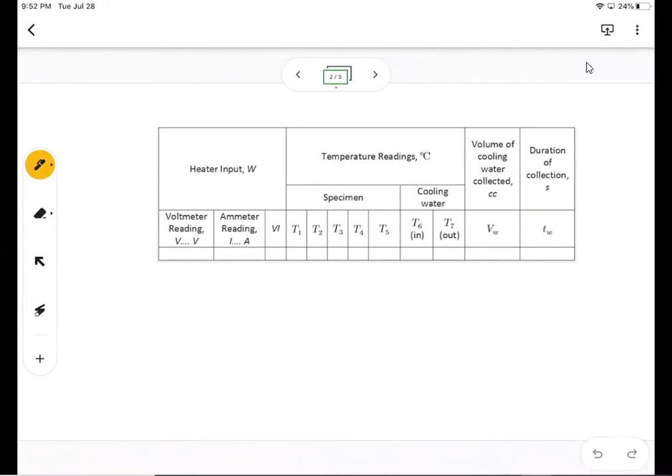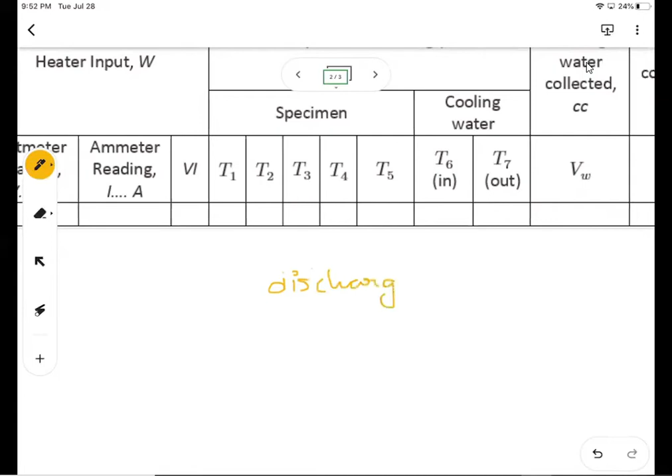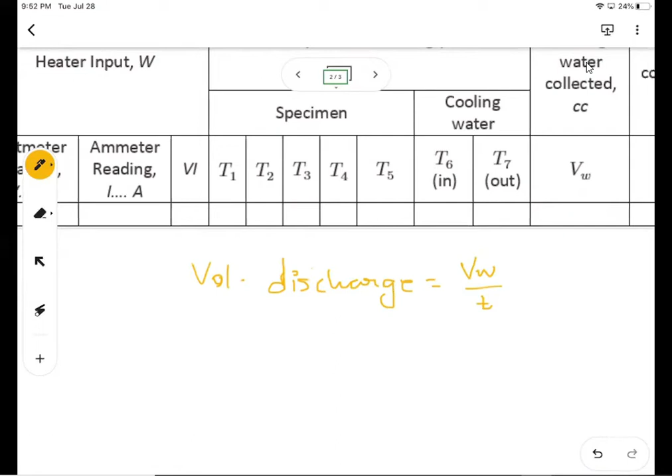Once you have volume and fix a time, the next parameter you can find is the discharge. Discharge is nothing but the volume upon time, volumetric discharge basically. This we can call volumetric discharge.

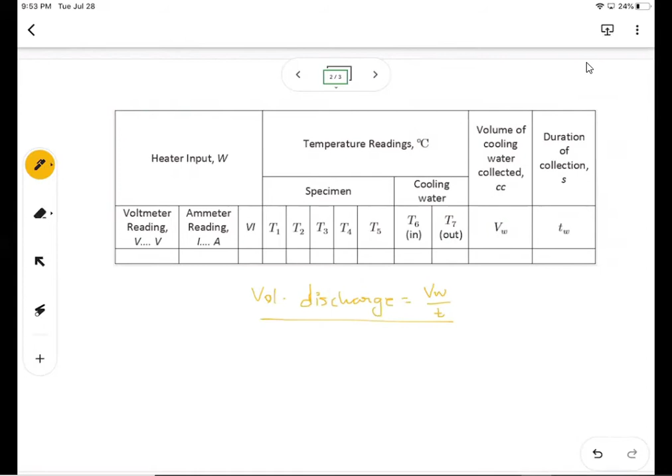So in order to find the value of K, we are going to use a very simple equation, which we have covered in our lecture also, famously known as Fourier's conduction equation, which is Q equals minus K A dt upon dx, where A is the cross section area. You can get it from here.

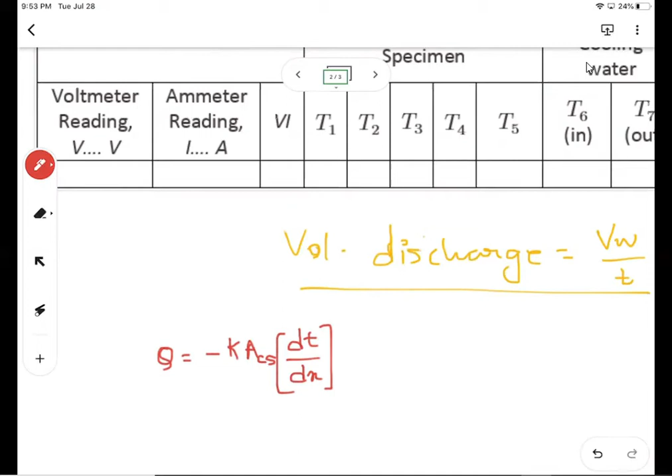But we need to find out the heat transferred through this rod, this metal rod, and ultimately the value of Q which is transferred. So to find Q from here, we use a very simple formula, Q equals to mCp delta T, where delta T is the change in temperature, or the rise in the temperature change.

Hence, there are two thermocouples attached in order to find out the temperature difference. So we can also equate this with the formula mCp delta T.

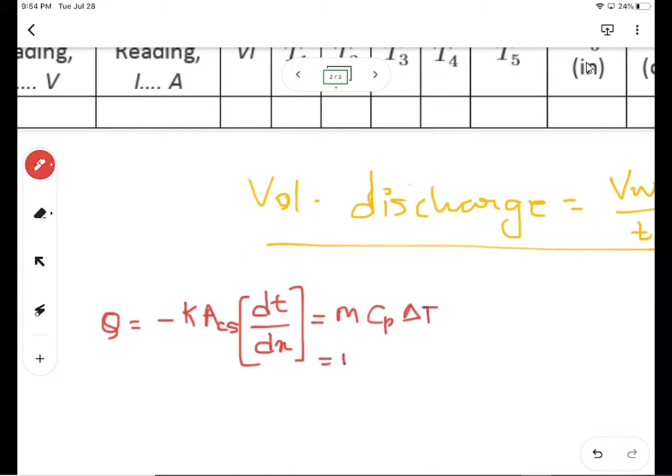Or m Cp times T7 minus T6. T7 and T6 are nothing but the cooling water temperature of output and input. So if you keep K on one side and substitute the other terms on the other side, ultimately you can get the value of K.

So this was the part that you need to know. But what about the values? Do you know what are the different values? Yes, we know temperatures T6 and T7. Cp of water is basically a constant, and we usually take it as Cp equals 4.187.

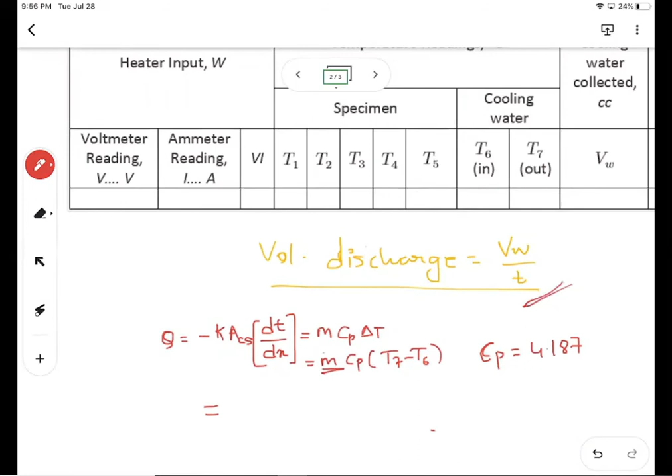And mass, m dot, we need to find out what is the value of m dot. We can get the value from here. It's very easy. We know that the volume discharge is given by this formula. Now, if suppose I want to find the weight discharge, we can multiply. We know the formula that mass equals volume into density, or else volume equals mass upon density.

So if I want to find the mass, I just need to multiply this volume discharge into its density, and density of water is how much? It is 1000 kg per meter cube. So just multiply this term with 1000 and you will get m dot, mass flow rate. This was basically volume flow rate, and from that we come to mass flow rate.

Now once you get m dot, you can substitute the value of m dot here. So you have m dot, you have Cp, you have delta T, you have all these values, right? Now on the other side, that is on the left hand side, area of cross section.

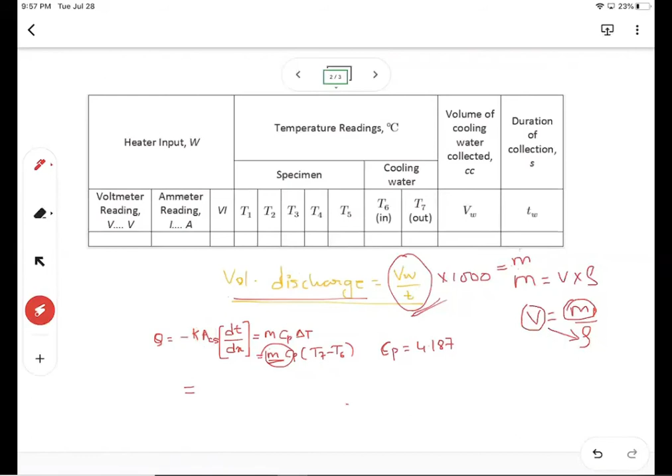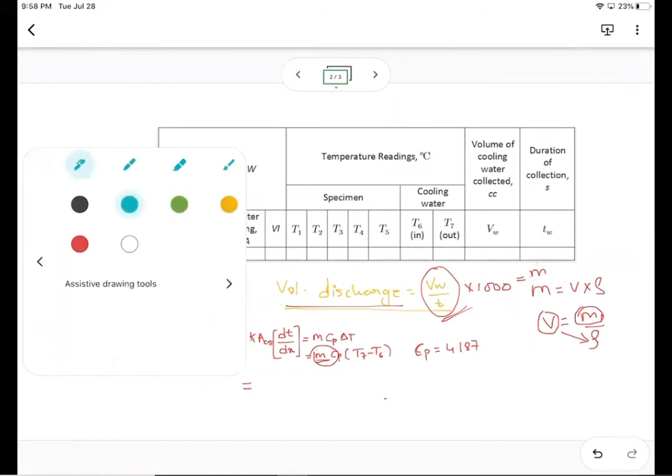Let me just draw it for the sake of understanding. So we are considering that there is a rod. Let me just draw a simple rod. Okay, this looks good. So there is a rod, right?

Now we are transferring heat from one end to another by conduction. So which is the area which we would be considering? It would be this one. The area that we would be considering would be this area, perpendicular. It's basically nothing but a circle.

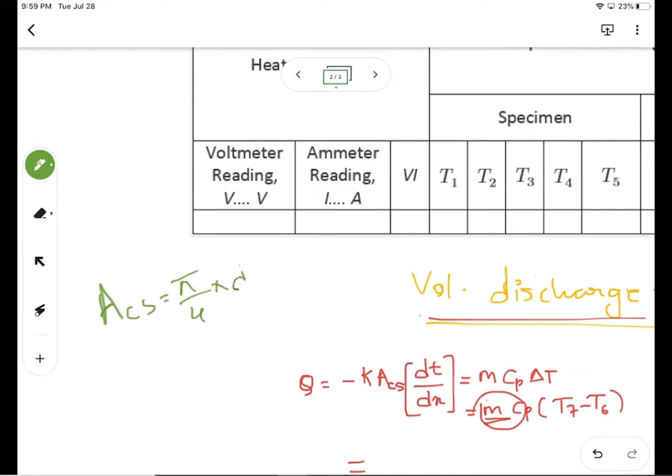So the cross section area can be given by pi by 4 into d square. The diameter of the rod would be given to you already. So pi by 4 d square will give you area of cross section.

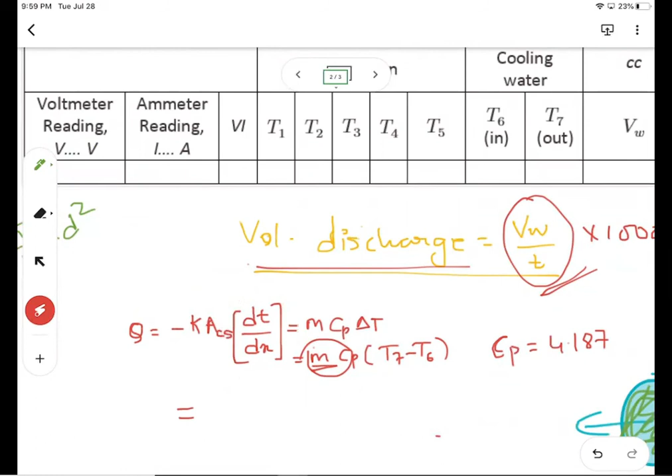Now this term dt by dx. For this term you would have to do a little bit of calculation in a graph. So for that, let us consider a graph with x and y axis. And in the x axis we are basically taking distance L.

We would be considering L, and suppose on this axis we are considering only temperature. This axis we are only considering temperature. So since I have told you, if suppose the total length of the rod is around 100 mm for example, the thermocouples are situated at equal distances. So basically you can plot what is the temperature at the first thermocouple.

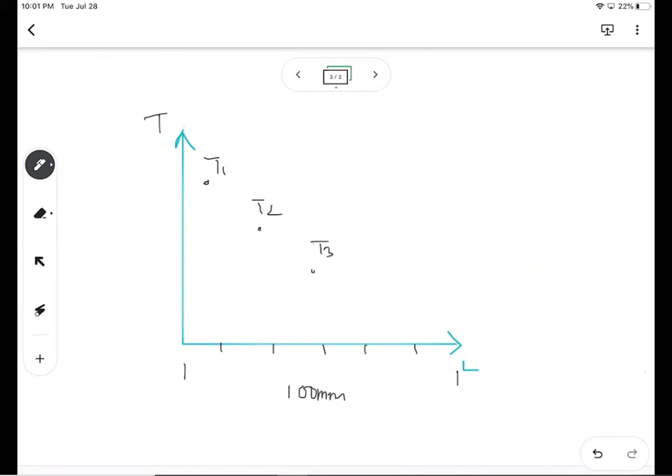Definitely at the first thermocouple the temperature would be maximum. Suppose this is our T1, and second point would be somewhere here T2, and third is again downward. So there is a negative slope that you basically get. Just connect all these points.

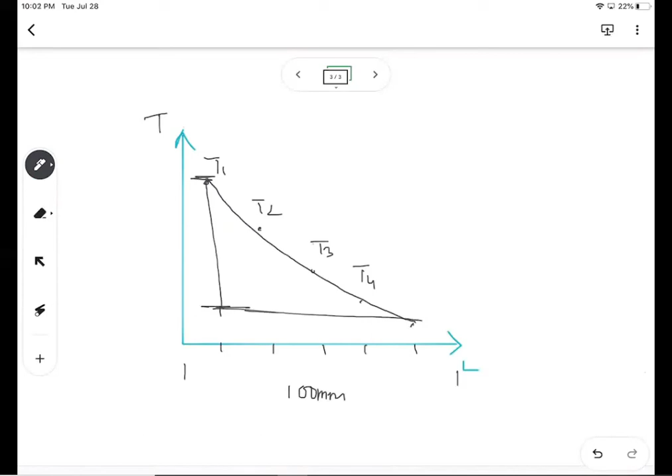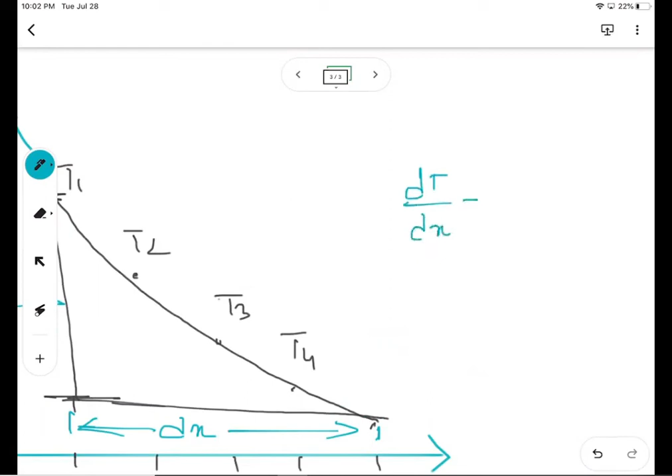This would be the temperatures, and this is nothing but we call it as dt. This is our dt, that is change in temperature, and this is our dx. So you can get the value of dt upon dx from the graph, or from the slope.

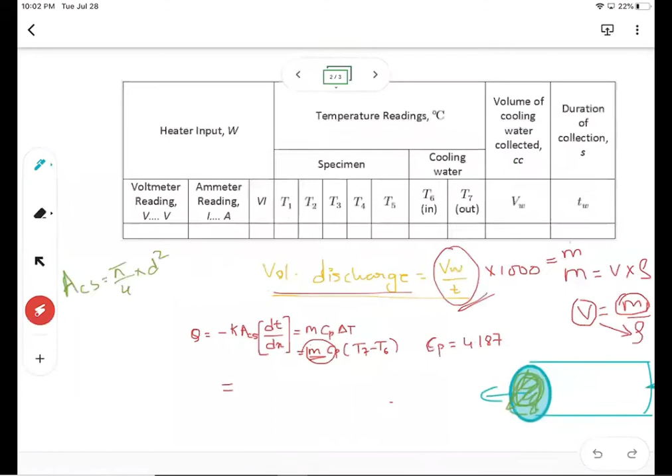So now in our expression we know area of cross section, we know dt by dx, we know the value of m, we know the value of cp, we know the value of dt. So finally we can find out what is the value of k for this particular rod.

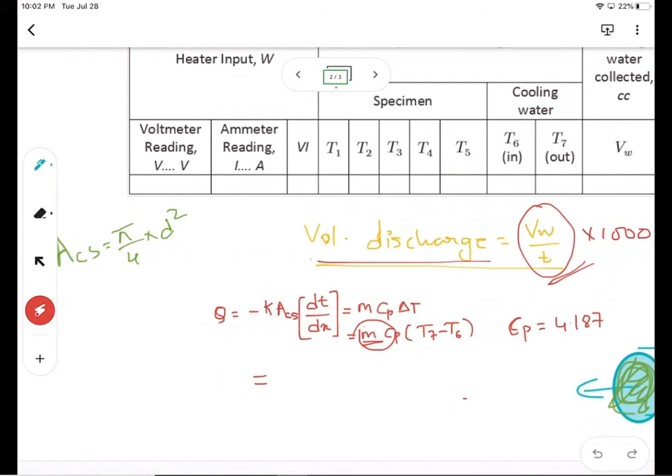And similarly you can definitely change for the second reading. You just need to change the voltage. So basically all the terms would change, and again you have to wait for some time in order to get a steady state. And again finally you just put up this formula of heat balance, and you can determine the value of k again. So in this way this experiment has to be performed. Thank you.